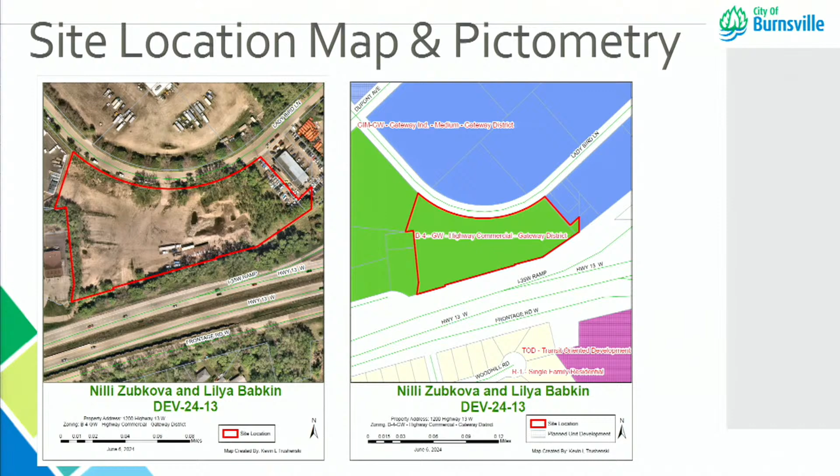To jump into the site plan, the applicant is proposing to improve the site. Or, I should give you a little background on this. The background is this application came forward from an existing code enforcement action, and this application was brought forward to remedy the code enforcement action that was done at that time. So that's what initiated this application. They are proposing to use the site and improve the site to essentially get approvals to approve essentially what's already happening there illegally. So with that, they're proposing to improve the site.

Everything on the site plan in the brownish color shows the drive aisles that will be paved. The yellow is the parking stalls that will be paved. They are proposing to use 106 semi-truck vehicle parking bays of various sizes. There was a breakdown in the report on the different sizes for large semis, somewhat smaller, and kind of half semis. There are also 20 visitor parking stall bays, though only 6 are required by city code based on the existing building they will use as office space to run the business. That's essentially on the center of the south lot line, and each vehicle has associated parking bays.

A couple things to note: one comment in the staff report, and a condition in the recommended changes, is for the entire site to have curb and gutter around the perimeter of the parking lot. That's a city code requirement. It's not currently shown here, so there may be minor adjustments, as curbs can be 12 to 18 inches depending on which type is used, which could shift some dimensions by a foot to a foot and a half. They do have adequate space to make that change.

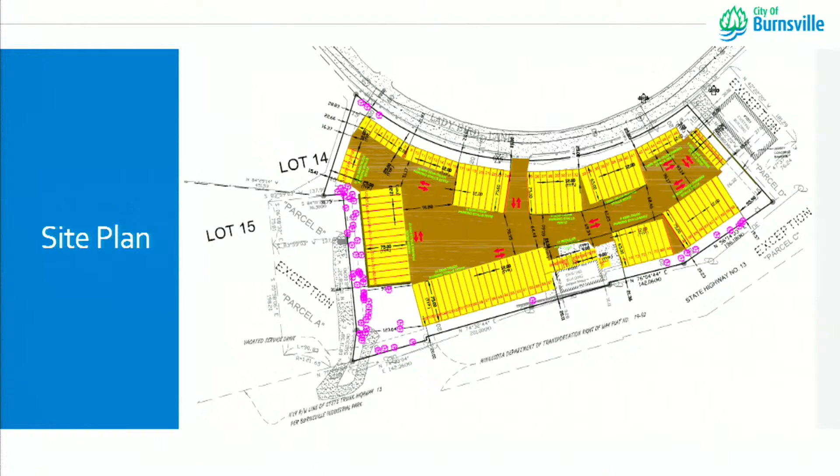There's also a condition from the city engineer, in the engineering memo, requiring verification of turning truck movements to confirm that vehicles in the various spaces shown can back in and out adequately. That was not submitted as part of the application materials.

As far as the landscape plan, I'll mention this because landscaping is a key component for a CUP with semi-truck parking, as screening is a major requirement for that application. They currently show purple and green trees as preserved trees of different species and varieties, whereas the neon green trees are the newer trees being proposed.

The landscape plan as it currently sits does not meet the ordinance requirements by quite a lot of shrubs, and some deciduous, coniferous, and ornamental trees. Additionally, screening needs to happen on the west, north, east, and south lot lines — all the lot lines. The south is an exception since there's significant existing vegetation in the Highway 13 area that will be preserved as part of this, so staff is comfortable that it will provide screening for the south lot line. But the west, north, and east need to provide full screening for semi-trucks at maturity for the plantings.

As currently proposed, the lime green represents arborvitae or ornamental trees, which don't provide full screening at maturity — they're much more narrow than typically wanted for screening. So one recommendation in the staff report is that a variety of trees be used to meet ordinance standards, mixing coniferous, deciduous, shrubs, and so on to provide more year-round full screening from essentially ground level up to the height of a semi, about 14 feet tall. That's another condition in the memo.

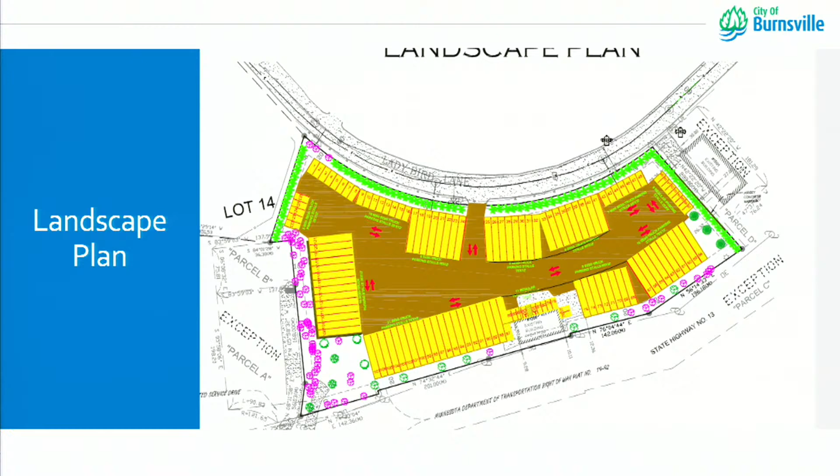As part of that, the city forester asked for the woodland evaluation packet, which would tell us how much needs to be replaced on site. They provided a very comprehensive tree inventory, but it didn't evaluate the cost of replacement for trees being removed over the allowed threshold.

The conditional use is for an open storage lot, since semi-truck parking is considered open storage in the code. It is an allowed conditional use with no additional standards beyond conforming to the conditional use permit standards and meeting screening requirements. So they're proposing to use it for the 106 semi-truck parking stalls. As I mentioned, the conditions include the curb and gutter, the woodland evaluation worksheet, and additional landscaping to meet landscape and screening standards — so there will be quite a number of additional trees and shrubs on the site. Also, as mentioned, access will be changed to be off of Lady Bird Lane instead of Highway 13.

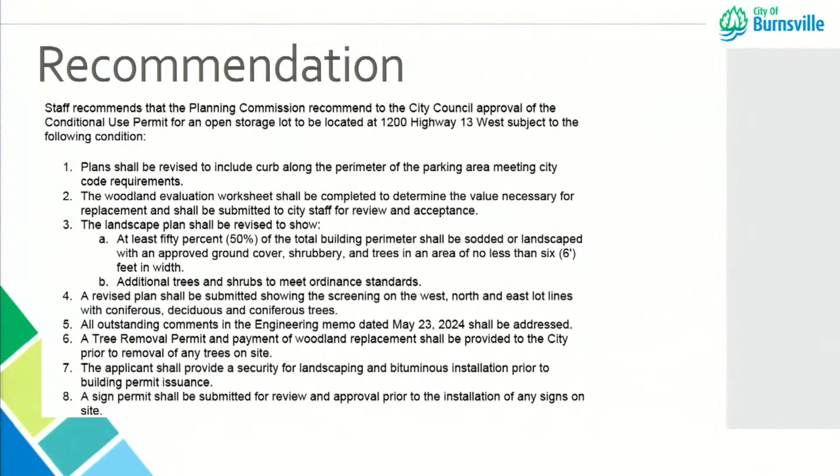Staff does recommend, based on the conditions included to satisfy where they're deficient to meet the standards in the ordinance, that the Planning Commission recommend to the City Council approval of the conditional use permit for an open storage lot at 1200 Highway 13 West, subject to the 8 conditions in your packet, along with the outstanding engineering memo conditions. With that, the applicant is present and staff is here for questions as well.

Thank you, Mr. Shea, great presentation. My first question: there's a couple conditions like curb and gutter and plantings. Is that stuff the applicant knew about prior to the process and is submitting without knowing, or is this a notification that's late in the process?

The applicant has been working with staff for a long time because of the code enforcement action, so they've been made aware of all the requirements surrounding this. This is the first time it's been formalized in writing, like curb and gutter, rather than just emails, but they were pointed to the specific city code sections. Curb and gutter is required for all parking areas, it's numeral 7 under the parking section.

So it's basically been an unpaved storage lot, and that's what the problem has been. What's the advantage of paving it versus leaving it unpaved, and what's the risk? Paving is required for the open storage lot use. Right now they're operating without the conditional use permit. All the requirements for paving, curb and gutter, screening, and landscaping are part of the requirement to have that conditional use permit. It's bringing the site into compliance with the standards necessary to operate a business of this manner in the B4 district.

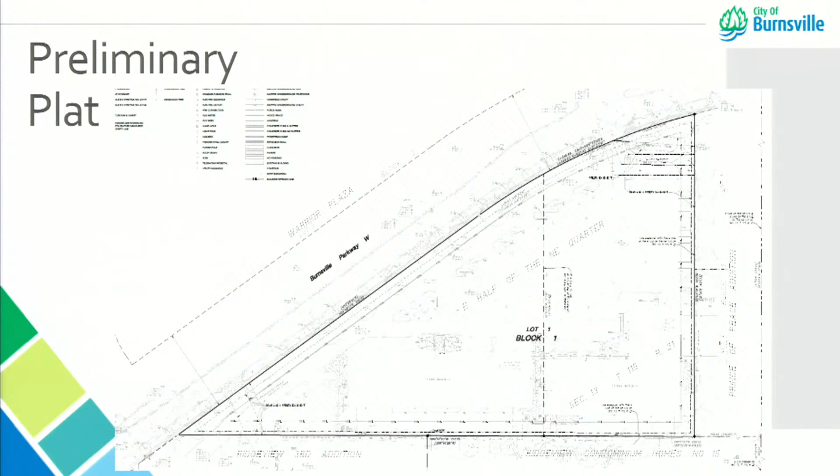So the preliminary plat as it sits today, nothing on the site changes from the plat perspective. It's just combining the 2 existing lots and then dedicating the perimeter drainage and utility easements required for preliminary for all plats. Everything else remains the same. The access easements that are existing today stay the same, and everything gets carried over to the plat. So there's nothing really changing between those 2 - it's just to clean up and plat the 2 properties that are currently unplatted lots.

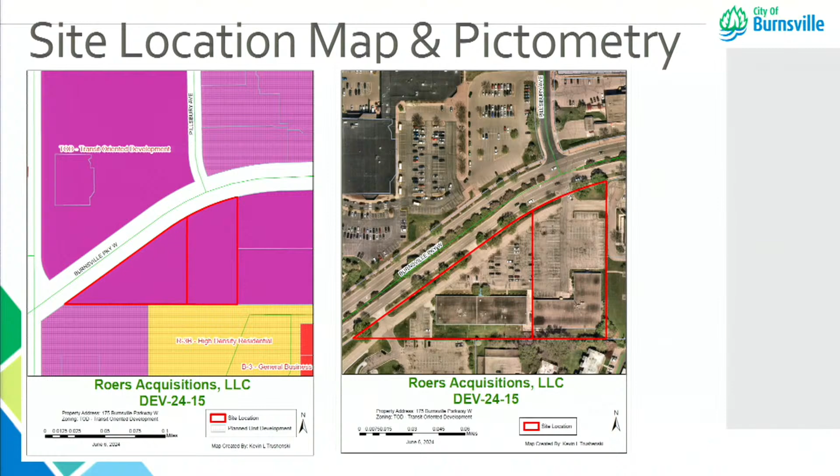There's two accesses into the site - one existing access. I'll just hop back - there are three currently on the site as it stands today. The center access goes away with this, and the east and west side accesses remain. So with that, that's essentially where the apartment building goes. The access on the east side is still maintained for the parcel to the east, and the western access would then function as the main access for this site.

They do have some amenities on site. Most of the units have balconies, along with a tot lot with a playground area that's essentially inside the east edge of the building to the site. They do have stormwater on site as well.

And the 170 units - I believe there's a breakdown in the report - but they're a mixture of 1 bedroom, 2 bedroom, and 3 bedroom units to make up the mixture.

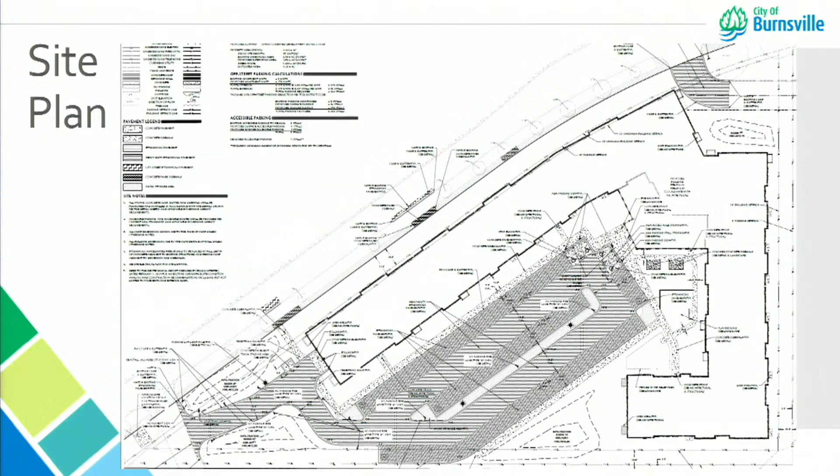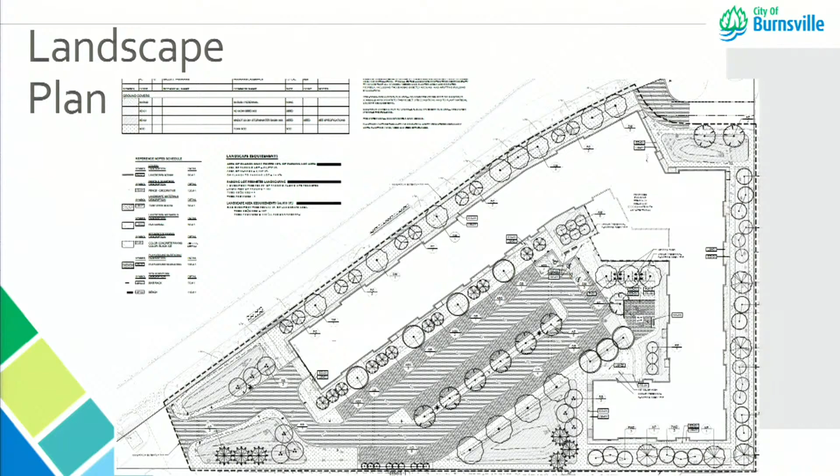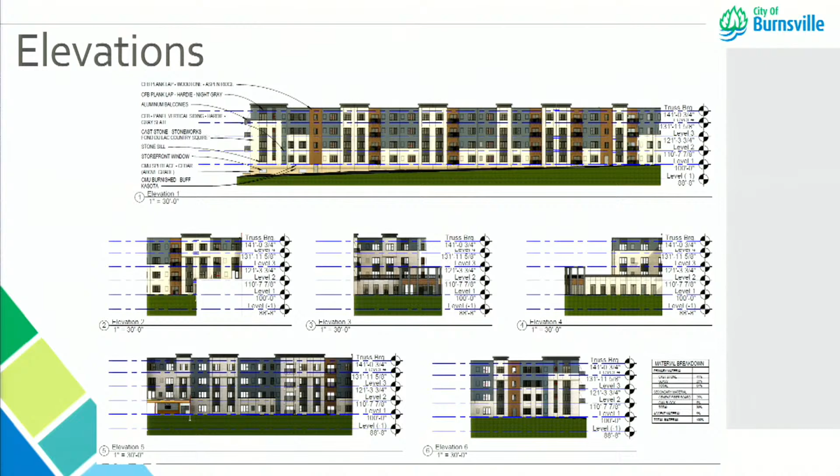They have been working extensively with staff to come to this point, so there's been a lot of back and forth to make sure they could meet these ordinance standards, which is why it has come in meeting all our standards, which is, I believe, a first for the TOD, if I'm correct.

As far as the preliminary and final plat, the standards are pretty minimal when you're doing a site that doesn't have any public infrastructure improvements as part of it, just the private side. So it's got to meet the minimum lot width, depth, size standards for the TOD district, which it does, given that the size of it is 4.47 acres and the minimum required is, I believe, 20,000 square feet. So you're well above it on that, and same with lot width and depth as well. They do dedicate the required drainage and utility easements along the lot lines as well.

So with that, staff does recommend that the Planning Commission recommend to the City Council approval of the application of Sam Trebesch of Loucks Incorporated for a preliminary and final plat of Heart of the City West to allow construction of a 170-unit apartment building at what would be called 175 Burnsville Parkway West, subject to the 7 conditions contained in the staff report.